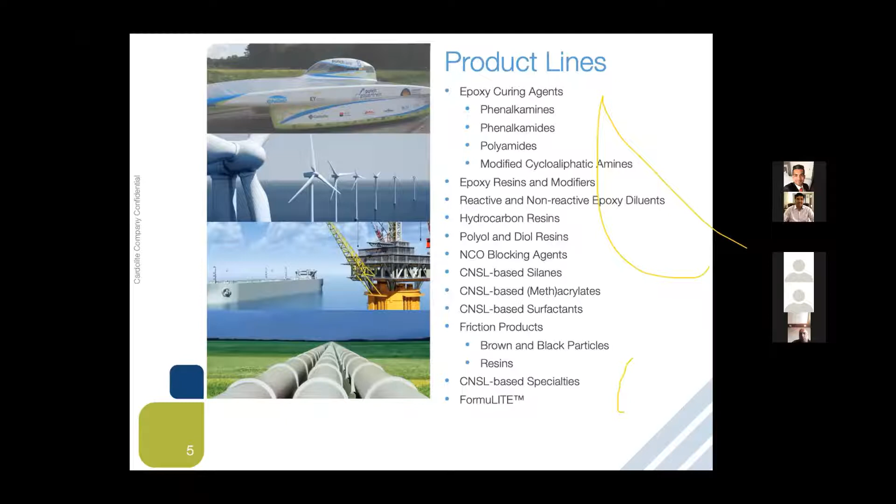Then we have CNSL based specialties. These are our high purity cardanols, which we also sell as nonylphenol replacements. Then we have our range of FormuLITE, which is a separate industry altogether. This brand is trademarked and goes into composite applications.

Coming to the market, the different types of markets that we cater to—our majority market is coatings. Since the products have very good anti-corrosive properties, low temperature cure, and other properties, the majority of our sales comes from coatings. Around 70% of our sale comes from coatings.

In this, we have marine and protective, which is our biggest chunk. We have industrial coatings and OEM coatings. We have transportation coatings, anywhere from the railways to container coatings that we do. And we have concrete flooring products, which is much moving into the Indian market as well.

So we have the products for primers as well as top coats. Then we have products for adhesives. Adhesives is one more market that we cater to a lot. These go into construction adhesives, transportation adhesives, electronics, casting and potting.

Like we just spoke about, we have products for composites. This is a separate market that we have. The automotive brake pads and drum linings is something that's been going on for years together. And very recently we've entered into rigid and flexible foam—not so much flexible, but more rigid—because of the insulation properties and the high heat resistance the products deliver.

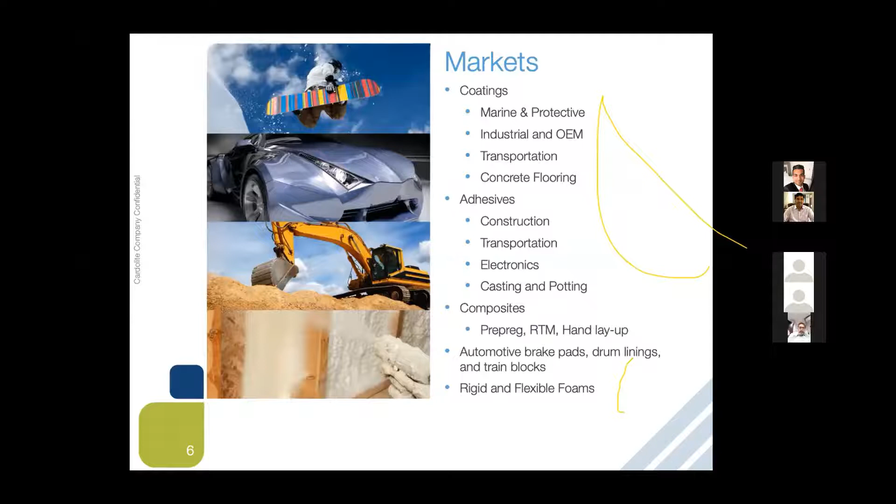So, global presence: the green dot—our headquarters is based in Bristol today. We were in New Jersey, and then the plant was slowly closed and we shifted our R&D and entire head office and warehousing facility to one location, which is now in Bristol, Pennsylvania. Then we have our two plants which are in red, both in India as well as Zhuhai. In India we have a plant in Mangalore. Zhuhai is in China, close to Hong Kong.

We also have our own sales offices in Europe, in Singapore, as well as in Japan, other than these locations.

So, manufacturing locations—we have two ultra modern facilities. One is in Zhuhai, which was built in 2004, the first photograph on top. The second photograph is Mangalore, which was built in 2013. We started operations completely in 2014. Both these plants put together have a capacity of 100,000 metric tons, which includes epoxies, polyols, curing agents, friction, all put together.

Both these locations are strategically located close to the port. Both are in special economic zones designed for exports, with 24/7, zero discharge facilities. So we are a green plant, whether it is China or India—both are green plants, giving nothing to the atmosphere, but producing products from a renewable resource.

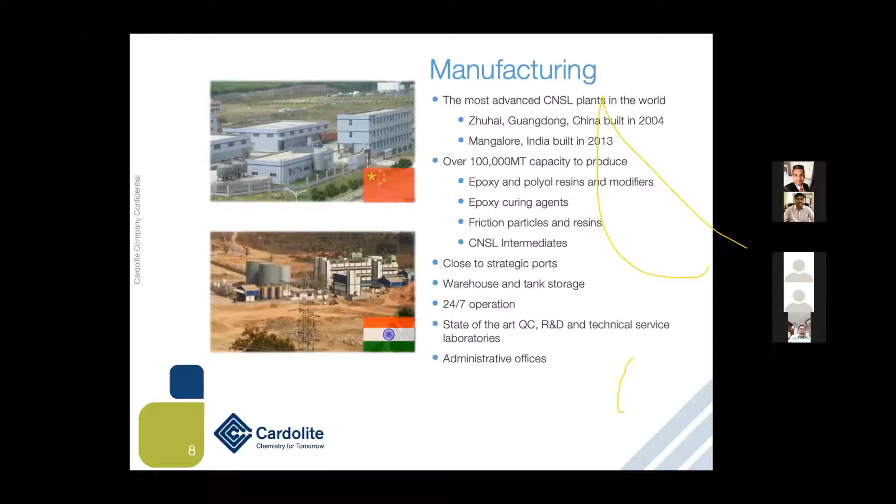On safety and health, we are ISO 9000, ISO 50000, ISO 14000, OHSAS 18000. And now we are going in for the new set of health policies, which is Responsible Care. We are already in the process of enrolling and getting our approvals for Responsible Care very soon.

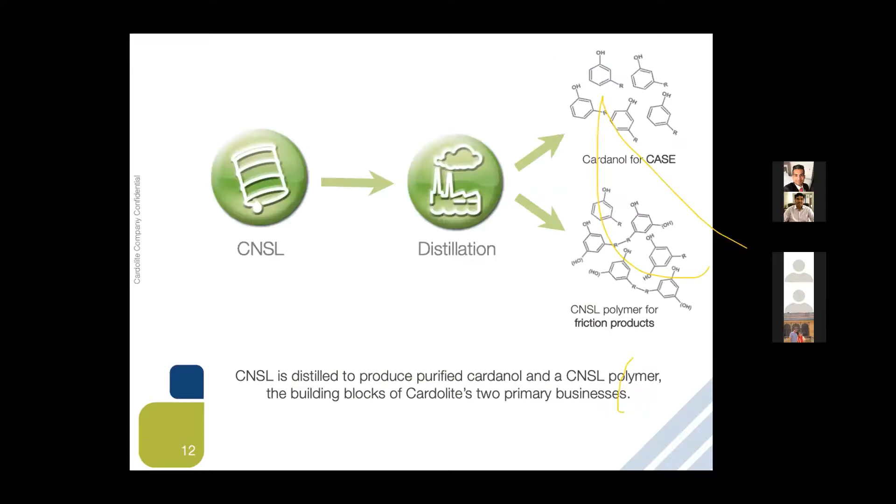We further polymerize it, and this polymerized cake is broken down into fine particles, which is called friction dust, which we sell to the brake lining industry. So now you understand why we said we are a zero discharge facility. It is because everything is consumed out there.

So this is our base molecule. Now, as far as you understand the base molecule, you will understand all the properties that come for CNSL based products, whether it is a phenalkamine, a curing agent, a polyol, or a reactive diluent. Every product based on CNSL will have these properties. Now, this is the base molecule of CNSL.

So if you look on the top, it has an open OH group, which gives you fast cure, low temperature cure, as well as excellent adhesion. You have the phenolic ring, which gives you high thermal resistance, fire resistance, as well as chemical resistance. And we have the long chain, which gives excellent water resistance, moisture resistance, that is hydrophobicity, flexibility, good surface tension, and water wetting properties. That is why we spoke about the surfactants - it gives a natural surfactant effect.

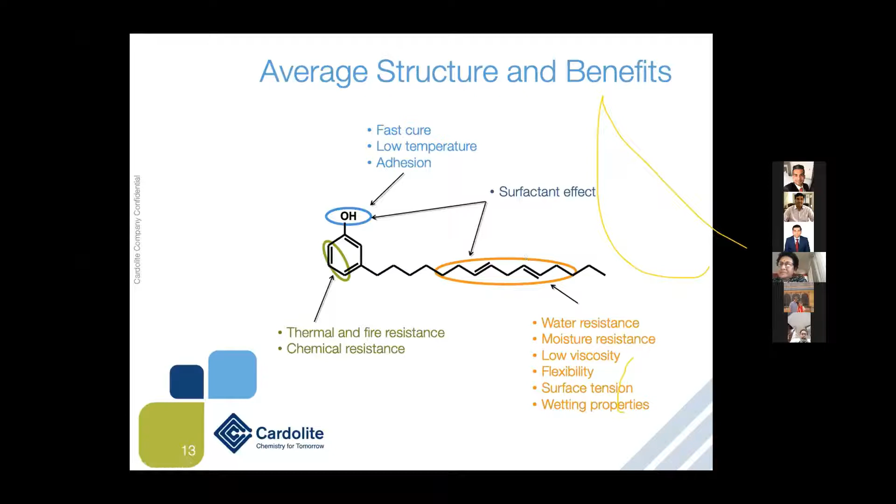So coming to the basics, which is curing agents, we have phenalkamines. Now the basic reason why phenalkamines are sold is fast and low temperature cure, so majority of our sale comes from the colder climates. Low VOCs - we have waterborne products out there.

Yesterday we had a beautiful presentation by Dow, and I remember there were some queries about single pack water-based systems. So let me tell you, we have these waterborne systems as well, where though the products have excellent water resistance, we've come up with waterborne products out there. So we have phenalkamines which are waterborne as well, and which are completely water resistant as well.

Then from phenalkamines you get excellent corrosion protection, chemical resistance, and the best property is surface tolerance. So even if your surface preparation is not up to the mark, there is a little bit of rusty substrate out there, it still gives you very good adhesion. So failure mode is very less.

Then we have phenalkamides, which give you the best of both. So they give you the properties of a polyamide, like good flexibility, a longer pot life, better overcoatability, fast recoatability, but at the same time properties of phenalkamines, which we already spoke about. It is a product designed and produced by us, given the name phenalkamides because it gives you the best of both chemistries. And that's what the whole chemistry is all about.

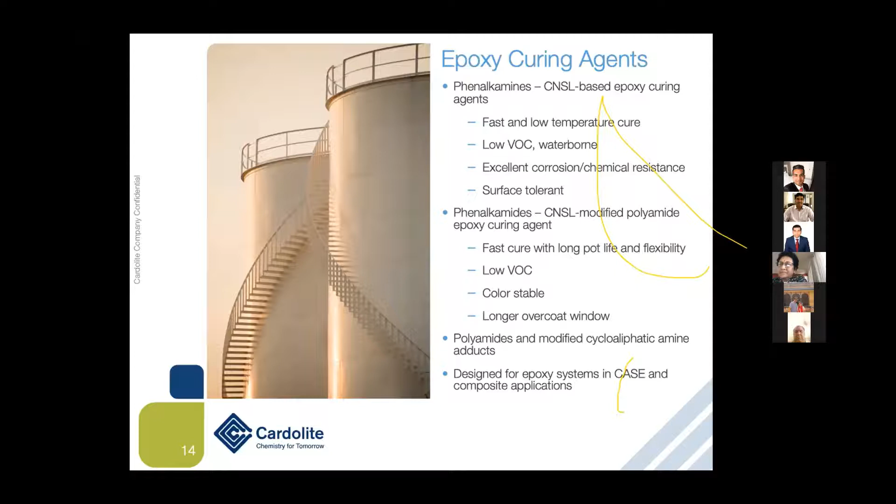Then we have our modifiers. Now these modifiers give you the first advantage of cutting down the viscosity, so for high solid formulations, instead of solvents, you can use modifiers. It may be reactive or non-reactive, but at the same time, because it is CNSL based, it gives you excellent hydrophobicity, excellent flexibility, low volatility, low odor, and of course it's a natural, renewable resource, so non-toxic when it comes to certification.

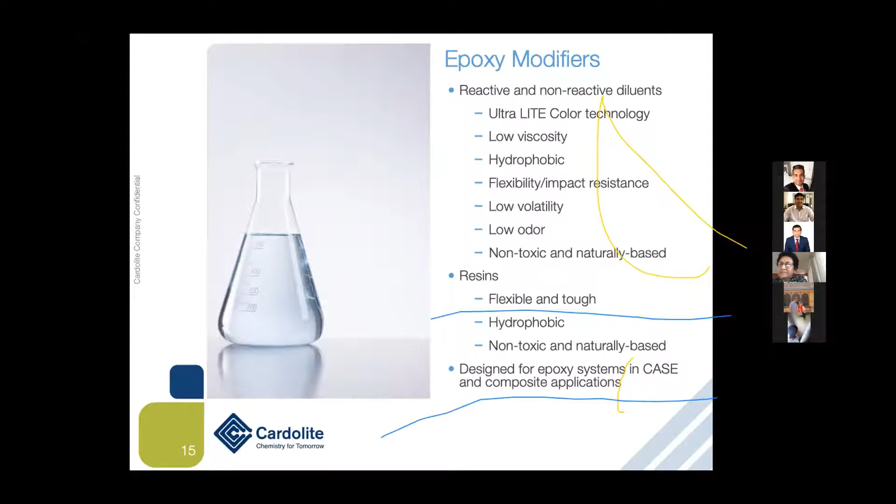We have resins as well, but these are into different applications, so we do not sell much of these CNSL based resins. But we have a lot of reactive diluents which can be considered as the resins.

Then we have CNSL derivatives - now these are polyols that we are going to speak more in detail about. We have both diols as well as polyols. Again, because these may be CNSL based or non-CNSL based, we have both the ranges. But particularly when we speak about the CNSL based polyols, they give you excellent hydrophobic properties, very good alkali resistance, good mechanical properties, and flexibility at the same time.

Then we have certain products that we spoke already about NCO blocking. We have diols, which we are not covering, and then polyurethane systems based on these polyols, which can go into various applications, including CASE application foam. So we sell rigid polyols for the foam, for the rigid foam application, and it also goes into composite application.

So the next slide onwards, it is more detailed about CNSL based polyols. I think I have already spoken a lot, I've taken half of the time.

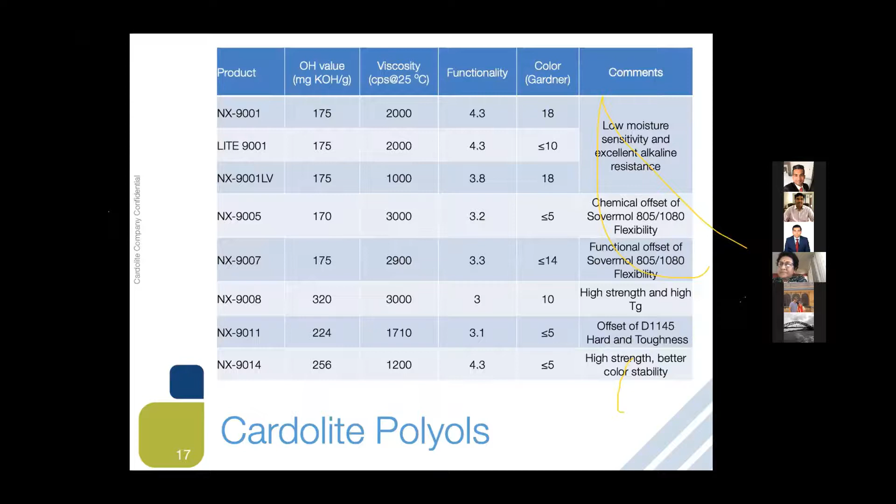I'll touch base on the mechanical properties. Normally polyol can be mixed with the polymeric MDI sites.

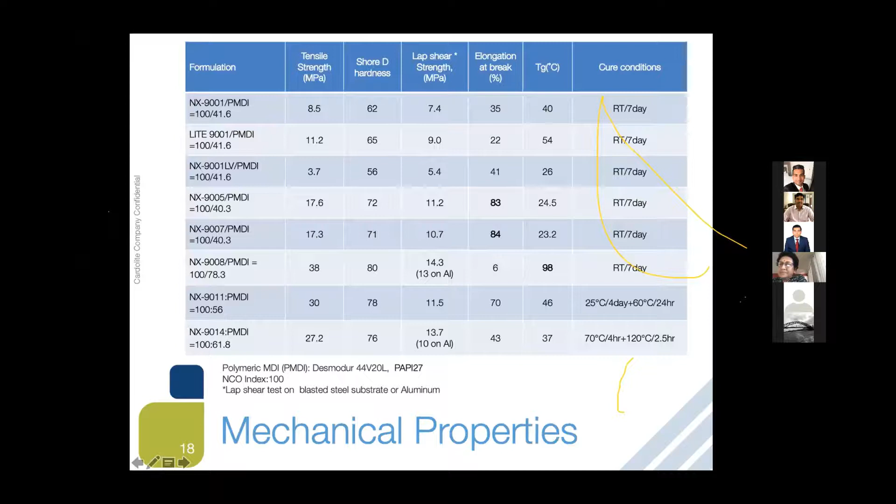And recently we launched a new product with better UV resistant properties, that is called 9014. I'll go to next slide, slide number 19.

Nowadays, polyurea coating is applied in those areas. So these are some application areas where you can use it, having better strength mechanical properties as well as better hardness property.

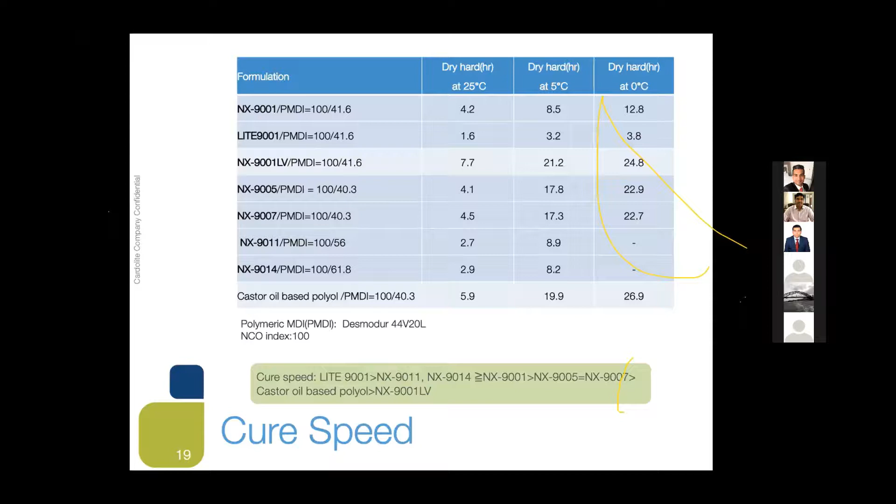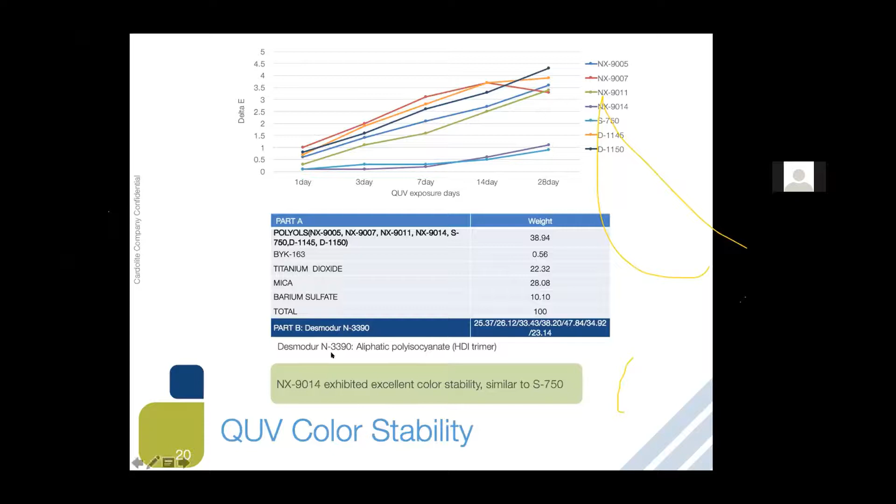As I mentioned, one of the products recently launched, shown in purple color, 9014, gives better yellowing resistance comparatively. We did some work with the current market, and here we use aliphatic isocyanate, not the aromatic polymeric MDI. On the aliphatic side we use Desmodur, one of our Covestro grades, N3390. Based on that we generated the data, which shows against competitors it has better UV property, that's NX9014.

This slide shows moisture sensitivity testing data we generated. We took polyol with isocyanate. Sometimes polyol reacts with isocyanate, and sometimes isocyanate reacts with water. So here we checked the CO2 evolution test. What does CO2 evolution mean? The lesser the value, the better — if you look at 9001, it shows only 6, meaning less moisture sensitivity because of the hydrophobic nature of 9001 compared to the castor based polyol. Other series show almost higher values. So it shows less moisture sensitivity for our CNSL based 9000 polyol.

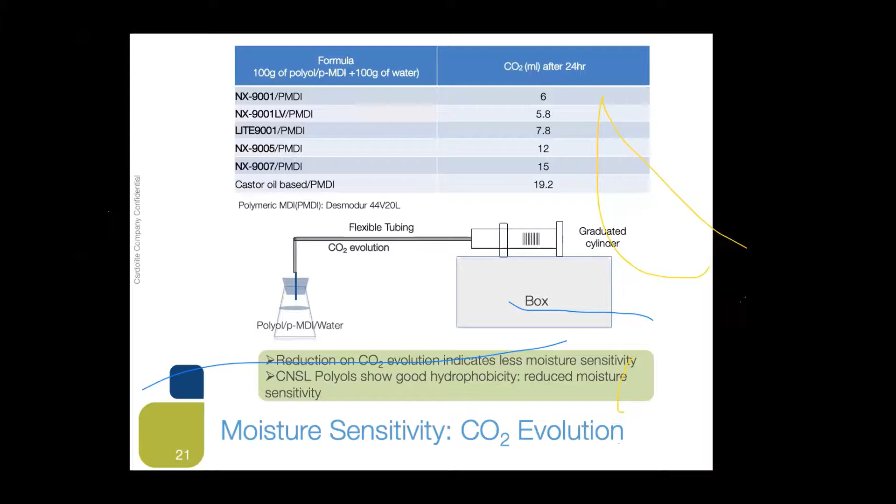You get reduced moisture sensitivity because this kind of technology, CNSL based polyol, normally has less moisture sensitivity. We also checked hydrolytic stability and adhesion, these polyols have better adhesion on SS surfaces and even on concrete. This data shows hydrolytic stability when we react isocyanate with water, and polyols like 9001 show a reduction of almost 26, and even other polyols like 9005 and 9011 show lower values compared to normal castor based polyol. So this is one of the better polyols for lower hydrolytic degradation.

We check mostly on the 80-degree for 7 days immersion test, particularly for this polyol. As I mentioned, slide number 23, these polyols have better alkali resistance compared to castor-based polyol. This is another advantage in the CNSL. If you look at this slide, we compare and generate data in our lab. Comparative castor-based polyol shows blisters when you check a 30-day immersion test with sodium hydroxide, but CNSL polyols have better alkali resistance. This is another advantage in the polyol.

Some application areas like submerged pipelines - you can use this kind of polyol.

Even our polyols, we've tested in some non-metal application areas, like automotive applications where you want to develop adhesives. Our 9005 has better adhesion, even on applications like nylon, polypropylene, polycarbonate, PVC - even on surface areas like PVC substrate, it has better adhesion.

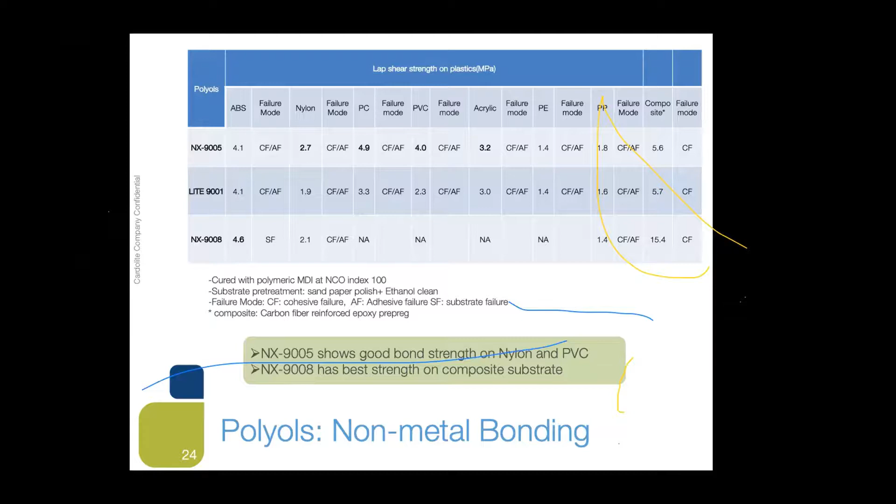To summarize, these CNSL polyols come from natural resources - CNSL cashew and castor base. It's not from petrochemical sources; these are natural-based renewable source polyols. These polyols have excellent chemical resistance, alkali resistance, and applications mostly in coating and concrete as well as metal. Some application areas include potting, and we recently launched a product in foam which has better fire retardancy property because CNSL gives better fire retardancy. These are some of the application areas where CNSL polyols work.

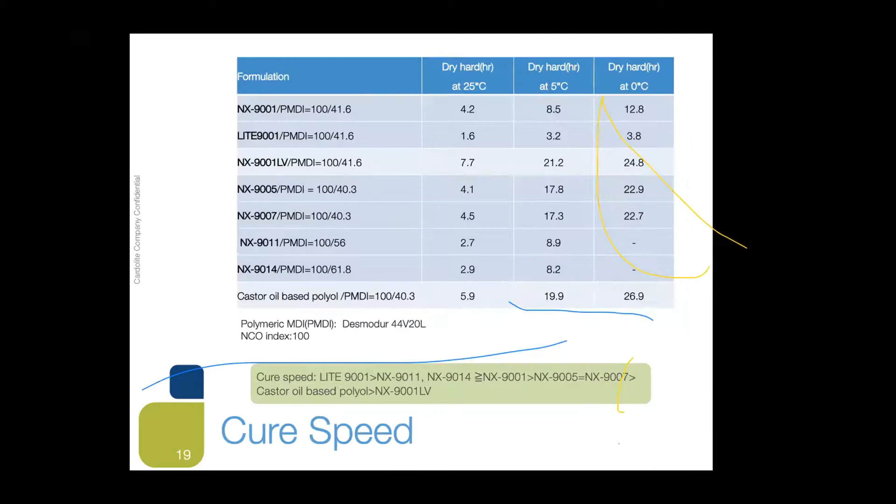Yeah, Ravindra, I am Deepak Maheshwari from Deva Paints, Ghaziabad. In fact, I was looking for some quality of polyols for flexible foams - to make flexible foams for thermal insulation coatings at temperature.

Can you guide us on the subject? Yes, we can - we have some products for thermal insulation property, because our polyols have better thermal resistant property. But for your application in flexible foam, you need that kind of flexibility in the substrate also, like rubber. So we have a product, and we'll send you some details.

Just send us the details and we can forward you some product information. We have already shared our mail ID with you. So in that case, if you have something separately, just send it to us. Sure, we'll note that and send it to you.

And secondly, you talked about the cardanols - basically your CNSL based polyols. In fact, I know your products - long back, one of your guys visited us and we discussed it. But when they sent the samples, they were too dark. Basically, we are mainly in clear coatings.

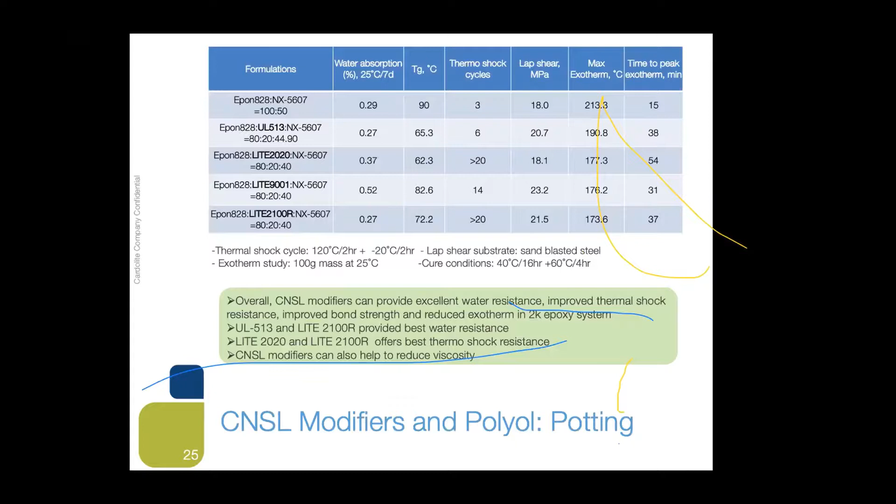As I mentioned, all CNSL-based products are a little bit dark, but we have some solutions. However, your data sheet says all types of cardanols have a yellowing property. Once the clear coating is made, it yellows after a few days, then it has no sense. So the point is we need a non-yellowing product as far as clear coat is concerned.

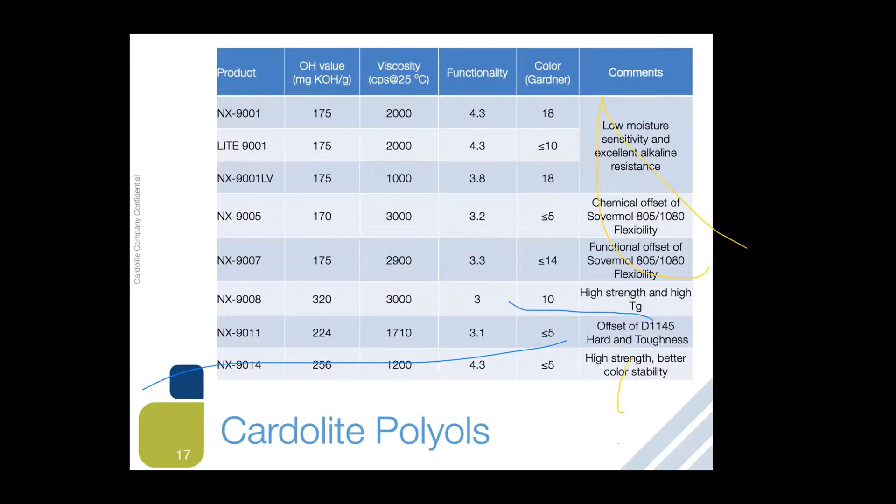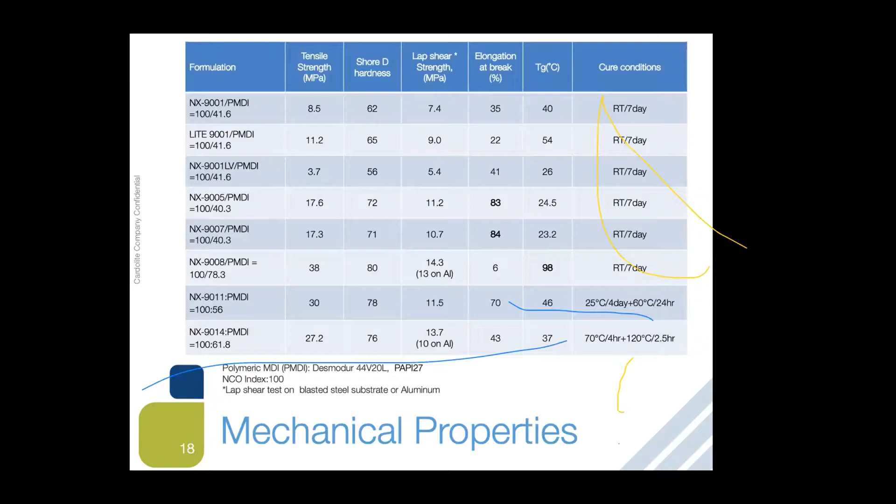Deepak sir, if it's non-yellowing products, I think our products will not do the favor for you, because these are aromatic background. Anything with an aromatic background has the tendency of yellowing. Even if I give you the lightest color we have, probably color 5, it will still have that yellowing tendency. That is an inbuilt characteristic of my CNSL-based products, which I cannot change. Let me share with you.

My work of making coatings for this purpose is for steel, SS. All companies are making steel utensils and they need coatings for designing. And all these products need to pass 50 cycles of the dishwasher test.

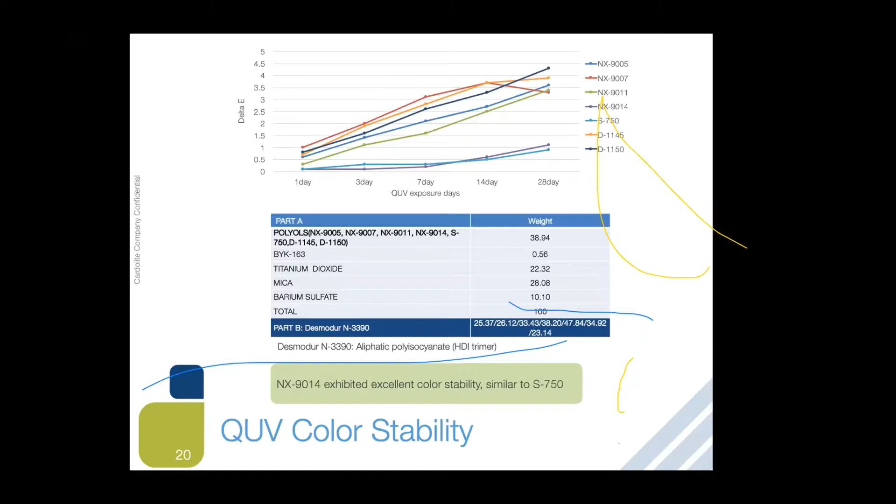Correct. What I understand is the Cardolite products can do better, but since they have a tendency of yellowing, we just can't use this. So is it a PU that you need, or can you also go ahead with an epoxy?

In broad ways, it is needed with PUs, because epoxies are not at all making export quality because of bisphenol A. So basically, for RoHS compliance, we need a product in polyurethane only.

In this case, I would suggest you go with the castor base, because you have a concern with color. So you can go with some of the polyol, which has better UV resistant property, which we recently launched. We'll touch base on that and revert to you, sir.

Definitely, I would like to have those kinds of products. There are two: one is flexible foams I am looking for, and another is for steel purpose, your Cardolite polyols.

Thank you, dear. Thank you.

Hello, Ravinder. Yes, I have a doubt. I'm Akash from Lakshmi Pen Industries, Jodhpur, Rajasthan. Yes, tell me, Akash.

I have gone through your slides, like your phenalkamine agents. Are they susceptible to direct coatings, like those coatings that are direct to metals and steels? I'm asking about phenalkamines, mine. Phenalkamine, are they susceptible to direct coatings, like without primers and on unprepared surfaces?